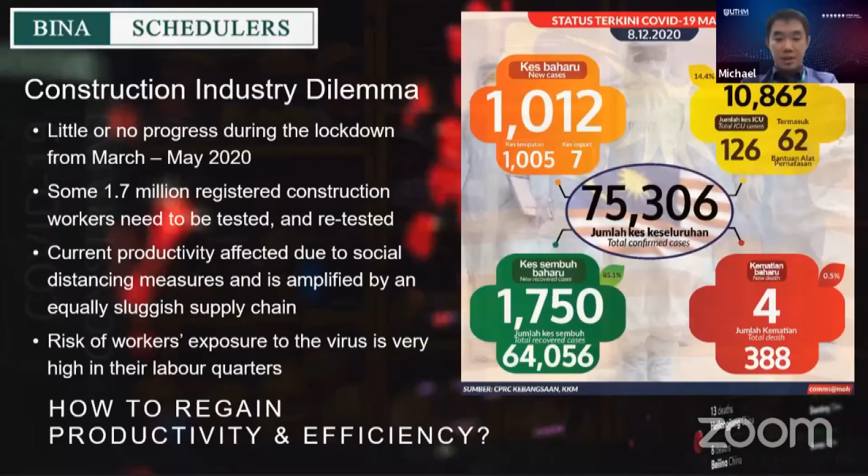These are the current constraints that we have to face. The authorities have introduced restrictions and constraints in order to safely continue our site activities. So these new measures are expected, I believe, even right now, we can expect to have them another 6 to 12 months until everybody gets the vaccine.

Most of the people that get exposed very frequently or high risk people get vaccinated, and that will essentially bring everybody to a safer level. So at least we don't have to observe all those measures so strictly, right? But until we get vaccinated, I think within 6 to 12 months, all these measures will still have to continue. So how do we deal with all this?

One, the MKN guidelines ask everyone to adhere to social distancing measures and guidelines. We have to wear PPE on top of the normal safety PPE that we have. Now we have the pandemic PPE, which is face masks, gloves, sanitizers. We also need to observe our habits in terms of distancing with other people, and also our habits in terms of cleanliness, how often we wash our hands, etc.

On top of that, the management of the construction sites will need to monitor the SOP for workers and staff. And we need to implement location tracing for everyone. When you come to office, you check in with MySejahtera. Then you also need to fill in the form if you have been anywhere outside your district. So those are the standard procedures that we implement in office, in construction sites, practically everywhere nowadays.

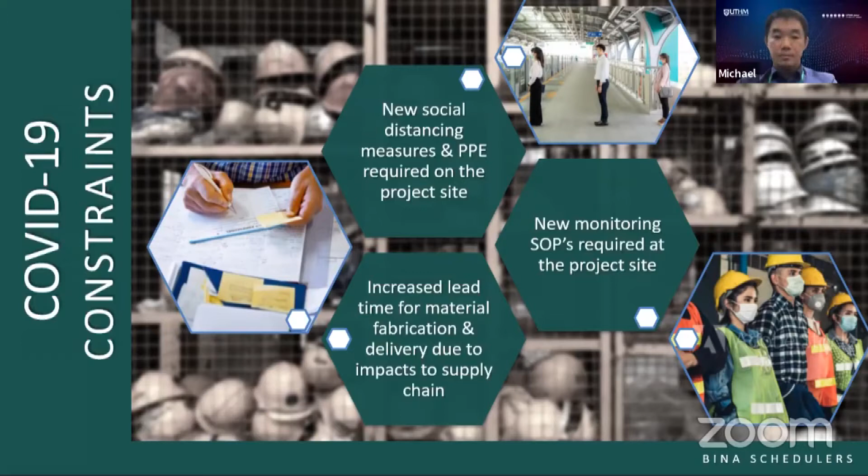To tackle all these new constraints, we have to change how we monitor and control projects on site. There's nothing else we can do except come to terms with the new distancing measures and the new PPE guidelines. So as we see it in the industry, there are 5 major challenges for the sites.

Right now, the major one would be reduced workers, because more often than not, the illegal ones are also contributing to the progress of the construction sites. Although they are not allowed, certain sites still have illegal workers, and due to the implementation of health procedures and health protocols, they will not be so easily available. They will go into hiding because they are afraid of getting caught.

So basically we just have the registered workers, and of course the registered workers will have to be tested on a regular basis. So we will have a limited number of workers, and we need to start thinking of how to rotate and how to use the limited number of workers.

Number two, we have more to do on site, especially for the management, because we have to implement all these new SOPs, and these will incur additional admin costs. And if you have distancing measures in place and supply chain disruptions, you will incur additional machinery downtime. Certain times you have to wait for your delivery, so your tower cranes, lifting machinery, whatever construction machinery is involved will be idling. So that is another issue.

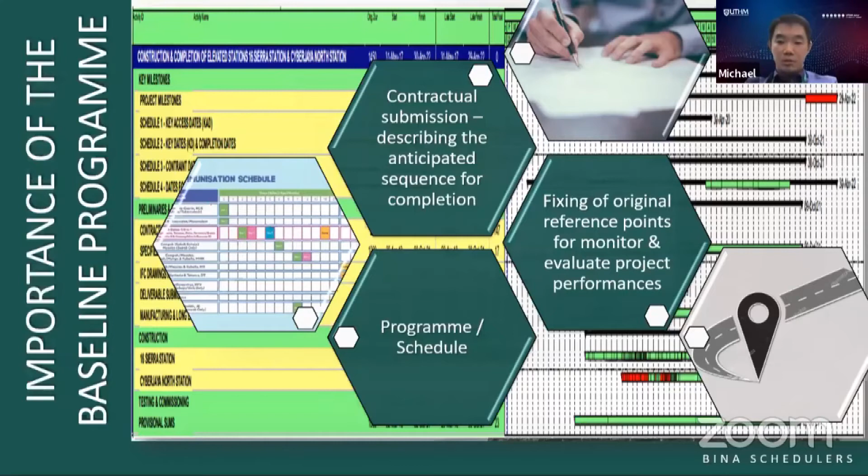So we move on to the next. How do we do this? How do we develop this baseline program? I think most of you would have studied this since you are in civil engineering. I believe it's in your project management module. Yeah, but the majority will be, I think, third year. When they are in the third year, then they will learn. So if the juniors are here, not many may have heard of this yet. Well, if you are one of the juniors, just don't think about project scheduling and baseline programs as a very difficult thing.

It's basically a timetable to do what you need to do. Call it a timetable, but this one is more high-tech. It has a few other functions where you can put in number of resources, your time. It can help you calculate a lot of things, generate your cost curve, your histogram for manpower, etc. Just take it as a very high-tech timetable, nothing more. This comes from me. I've used it for almost 20 years already, so it's just a big and advanced timetable. Don't shy away because you don't understand it.

So how do we establish this baseline program, which is a record of what you want to do when you get the job, how you want to finish it? First, we go for the quantities and the productivity table.

We basically need to go through a difficult period of extracting the quantities from the drawings and bill of quantities. To plan properly, you must get your numbers right. There's no shortcut to this, no magic to it. You just need to get the quantities out, and you need to establish the productivities for each trade.

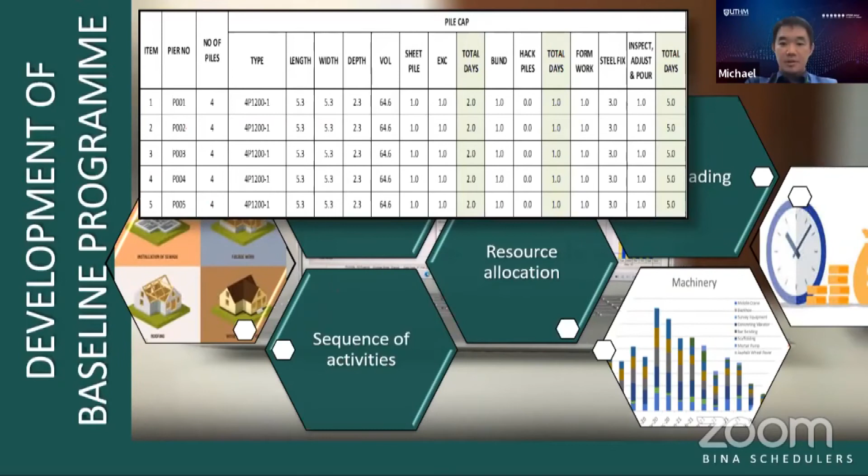At the same time, once you've done all these calculations, you'll be able to generate your machinery histogram, and this histogram is generated based on numbers — based on quantities, duration and numbers. That's why you have a spread of machinery across the months in the project. Okay, so this is just an example.

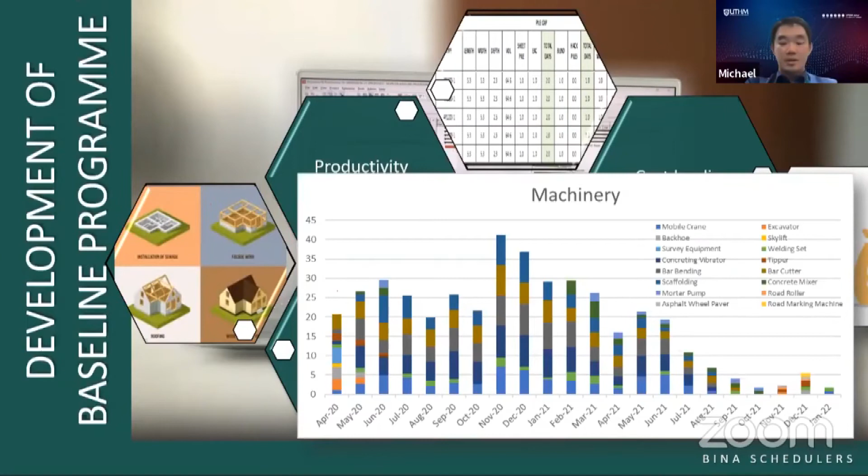All right, so next, once we have the baseline, what do we do?

We normally produce our baseline in Primavera because we feel that it's more powerful and gives us a lot of analytical tools, and the calculation of progress percentage and weightage is more stable and more contractual compared to Microsoft Project.

I've done an EOT, extension of time application, in Microsoft Project, and we had trouble comparing the physical progress, because in Microsoft Project the weightage calculation is skewed by delay. If you delay a particular task, that task becomes longer and longer in duration, and Microsoft somehow assigns more weightage to that activity because it has been delayed and takes a longer duration, so it's heavier in terms of weightage, which we believe is wrong.

That's why we normally do it in Primavera, because Primavera has a base weightage at the beginning of the project - what the weightage of the activities are - and it is fixed until you revise the program. It's in this sense that we prefer Primavera.

So for newbies who have no experience in Primavera, don't worry about that. When you really use it, you will understand. This is one of the things that makes me prefer Primavera over Microsoft Project.

For the bottom portion of the layout, it deals with elevation, how you see it from the side. From the top, you can see a group of squares with circles - the squares represent pile caps, the circles represent the bored piles. The colors also mean something: yellow is in progress, green is completed, and white is not yet done. Everything is numbered, inclusive of the dimensions and the pier numbering.

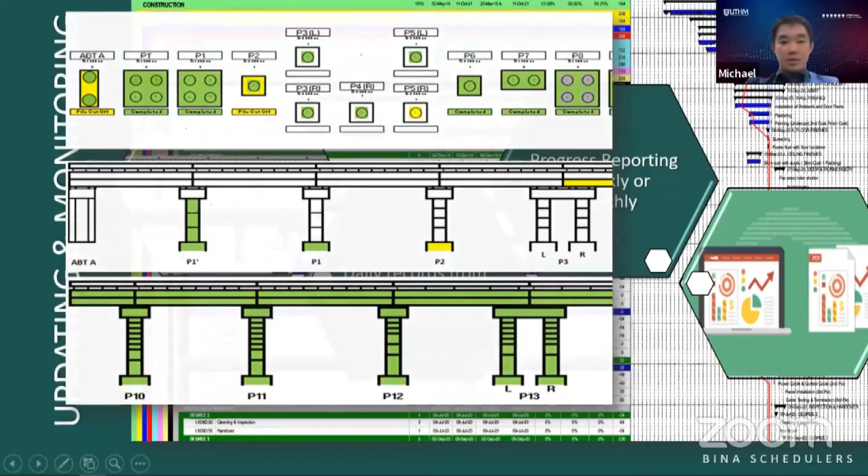When you look at the bottom row here, you'll see green lines, long green rectangles - these are basically the viaduct. When you complete the viaduct, we also highlight it green. With this format, you can distribute it to different levels of management and the construction team - from the engineer who updates it, all the way to the project director - and they will understand what this means. This is not a fixed format; different projects represent progress slightly differently, but the general rule is it needs to be intuitive, graphical, and easy to understand. People don't want a lot of numbers, and by the time you finish reading the numbers, there's no time left.

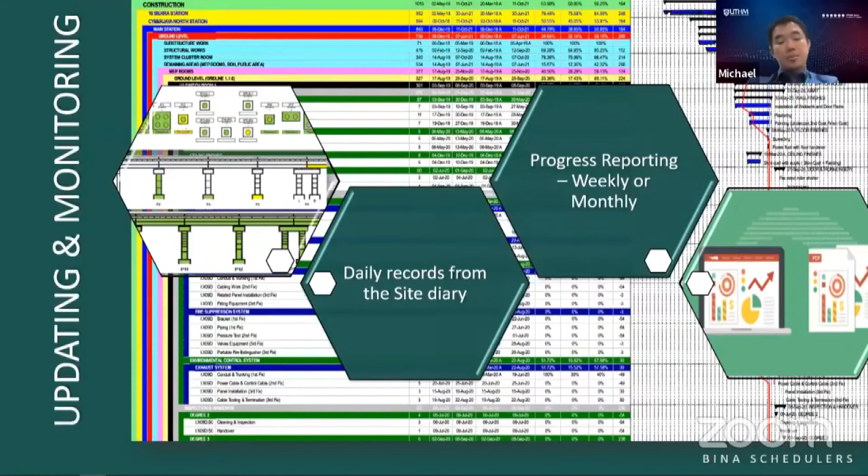So it's easy to understand and a very useful chart for tracking progress. With that, once you get your progress updated, you'll be able to use the progress to convert it into reporting - how you do that...

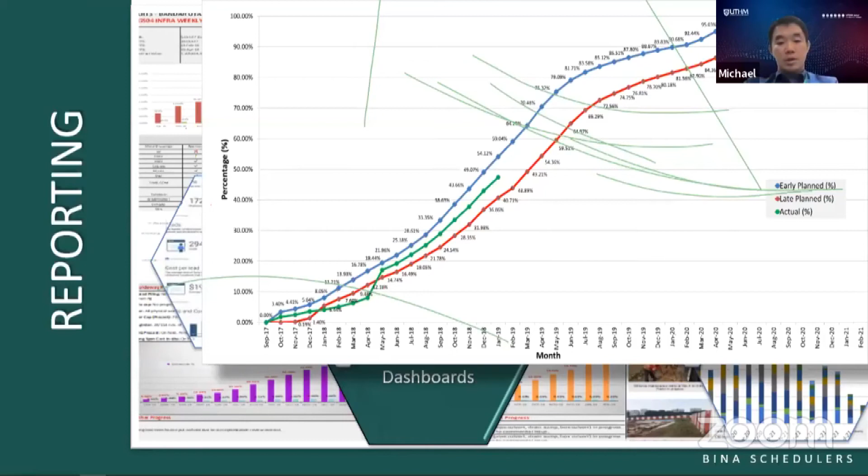So you will have, for example, your S-curve. I'll do a quick one on the S-curve. The blue line is actually the early curve, the red line is your late curve, and the green line is the actual progress that you have recorded. You update it in the program, and the program gives you a certain percentage. So you update it every month, and you will be able to see a trend in your S-curve. If you fall between your early and late curves, you are okay, you are safe.

With all those items that you have to produce to report to the stakeholders and the project team, they will use that information to track the progress of the project and also to make decisions. For example, certain issues are happening, certain delays that they don't expect are happening in certain areas. So everybody will need that information to be able to respond. That's why the project team is there.

At the same time, in recent times, we are doing monthly progress drone videos. Drone videos are becoming increasingly useful because they offer an aerial view of the project site. If you have a fixed point for your drone, fixed XYZ coordinates, when you fly you hover at a certain position and take a picture. That is a very good reference point for your time-lapse photographs, which will also be compiled into a video later at the end of the project, so you can actually see how your project is going month by month.

So up to this particular slide that I've explained, everything you have seen is SOP to us. That means you have to do this whether or not you have COVID. This is what we have been doing over the years to monitor a project properly.

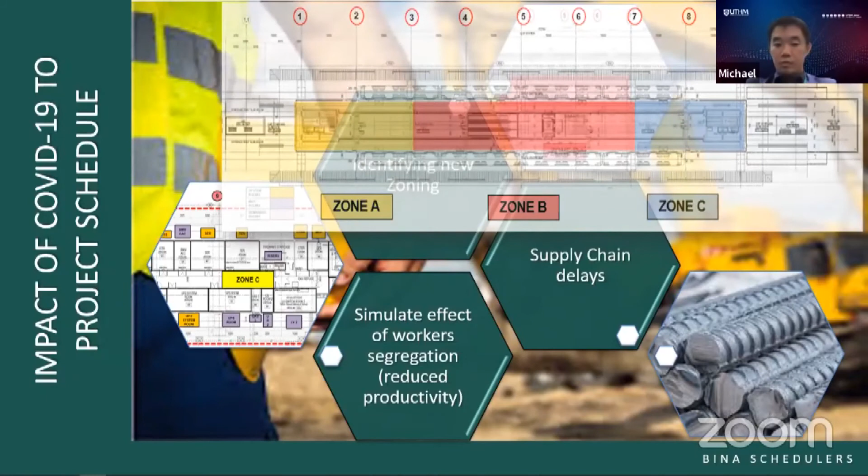With these extra zones, we will be separating the workers into separate small areas, and we have to really control where they are working. There will be a safe passage for their egress and ingress in and out of the site. Each worker will be localized in their specific zones. They are not encouraged to mingle, and if they do, it will have to be put on record.

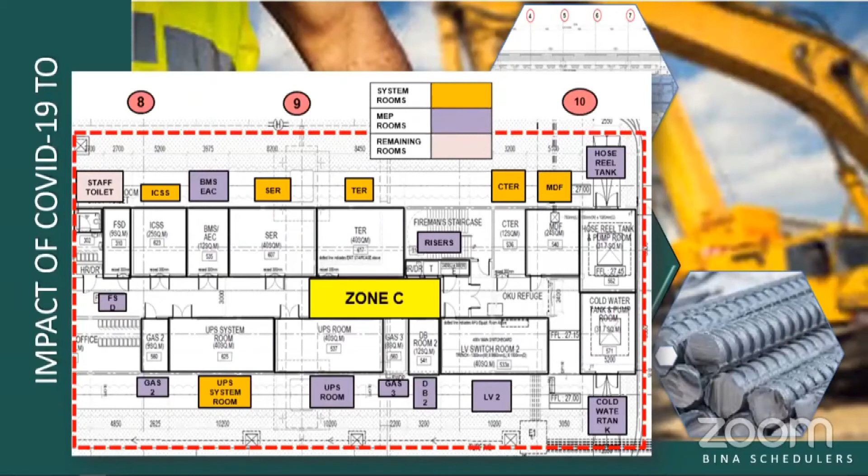This is what I said earlier, an additional administrative cost to the contractor. So the main contractor has to administer and manage all these new measures to ensure that their site is relatively safe from the possibility of infection.

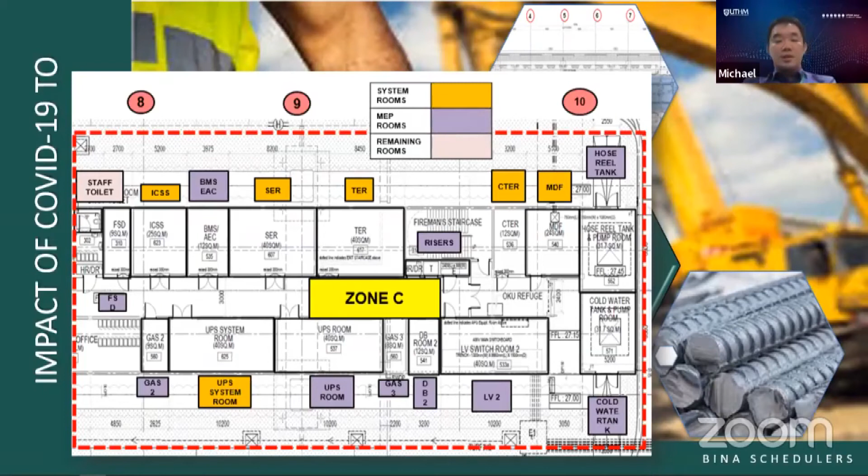Then the next issue we have to deal with is how to segregate the workers outside of the construction site. Right now we simulate how the workers are segregated on site by having more zones, etc., and because of that you also have reduced productivity. But at the same time, you will also have to manage their segregation when they leave the site, that means when they go back to their labor quarters, their gongsi. That is another thing you need to do.

And of course, all the work sequences and durations that you have in the baseline will have to be changed and adjusted due to all these distancing measures.

So from this new plan, you will have to recreate a new revised program. And this new revised program must also take into consideration how many workers you can get, how many workers that can be maintained on the site at a certain time. And at the same time, don't forget your material supply constraints.

Your suppliers will have to be updated, and you have to get how much material you can receive, the rate of materials to your site. So all these things must be assessed due to this COVID pandemic.

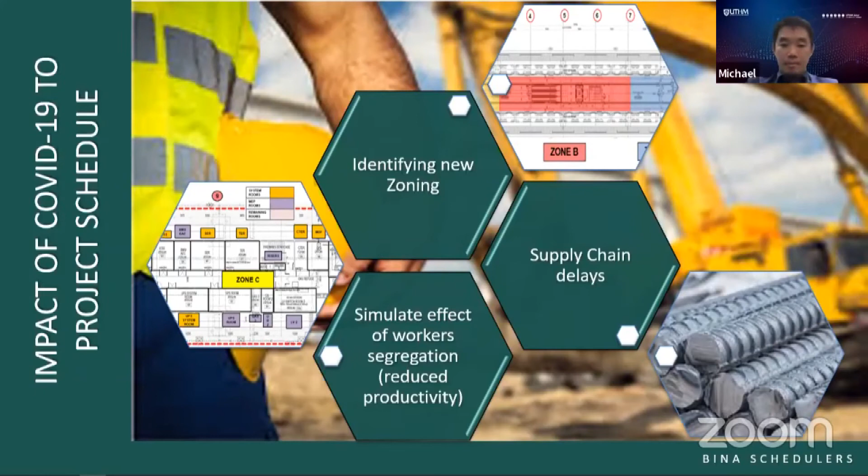With this planning process that we go through, we will be able to get greater accuracy in our estimates and in our project planning for the site targets. The project team will also get increased visibility of what they are supposed to do every day, every week, every month. They will have targets that will be distributed down from the project director all the way down to the project managers to the section heads.

So with this, I think everybody can share the planning document to be able to manage the site with a single plan. Everybody wants to do it their own way, but to achieve this plan, bear in mind that you have to sit down with the project team to come up with a decision together. This is how we're going to run it. So when you have that decision, that plan, that's where everybody has to move according to plan.

And then with this, everybody can also see the updates of what they've done, whether they have progressed in the correct way or not.

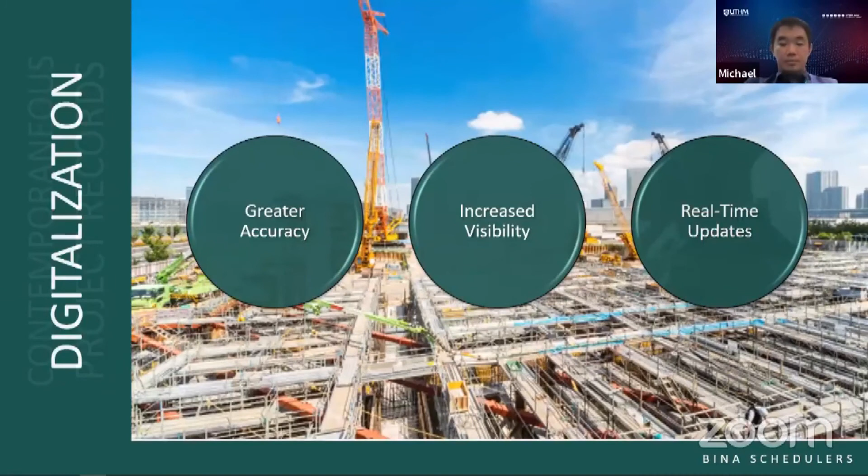So from all the examples that I've given, we also have a digital tool to make it easy for you to update what you're doing on site. It is basically a mobile app, so that you can key in your resources, your activities and manpower on the site, and also attach site photographs.

You also have a web interface where the planner or the administrator in the office can actually get the data that is uploaded to the cloud. At the end, the data gets compiled into a site diary, a hard copy site diary that can be the official document for the site, the daily record of the site, so to speak.

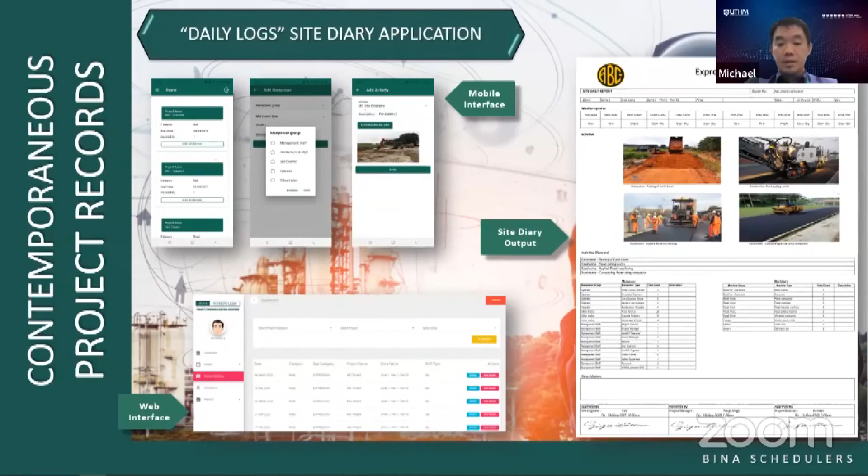So a good project control system allows us to systematically address all the numerous constraints on site so that we can plan better, we can execute our job better. This will also reduce surprises. Now more than ever with this pandemic, we have to plan properly so that we don't get bogged down by all the new constraints that are being introduced.

You can say all you want, but the projects still have to be completed on time. Maybe you get an extra 3 months EOT for the MCO, but after that, everybody has to perform according to the contractual time frame. So there is no excuse. With this, we also need to take it seriously that we have to replan our initial baseline to be able to still hit those targets.

Mr. Michael asked, which means that after the 3 months of EOT, there is no possibility of extension anymore? Unless you can prove that the extension is not of your doing.

Take for example, the Damansara cluster. That happened in Pavilion Damansara. I believe the authorities found that the contractor was responsible for not having a good enough environment. So I don't think the government or the client, the owner, Pavilion, I don't think they're going to take responsibility for giving you extra time.

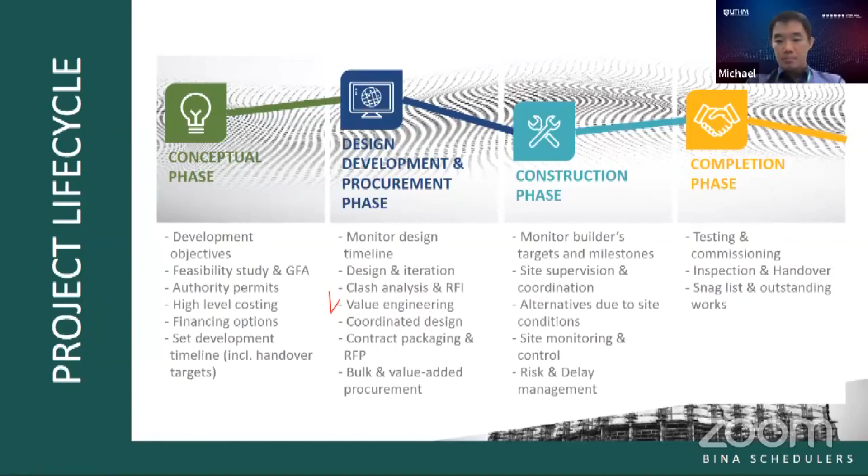Okay, so basically this is what we do on a daily basis. We do it for building projects, infrastructure projects, and oil and gas projects. There's one more category we call utilities, which is basically your power stations, your dams. Those are very rare, of course. This is what we drink, eat, and sleep every day. So I hope what I've shared gives you a better idea of what you are going to face when you come out into the industry.

So I open the floor for questions. All right. Thank you, Mr. Michael, for a very detailed sharing. I think project management indeed is very challenging for us because you need to be doing things from the big picture all the way to micromanaging. Maybe for some of us who are listening it could be quite new, or very far from us, because some of us have yet to enter the industry, literally on the site. So certain things are hard to imagine. Still, it is a very good exposure.

Because of time constraints, maybe we can only have one or two questions. So Miss Tasha Hui asked: Sir, would you say that the construction industry is no longer a lucrative one, especially during the pandemic? What advice would you give to students in pre-final or final year who are interested in serving in the construction industry? Lucrative. What do you mean by lucrative?